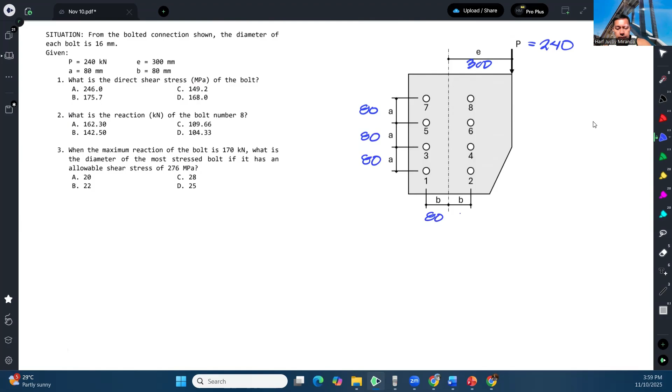Okay, so first question: what is the direct shear stress of the bolt?

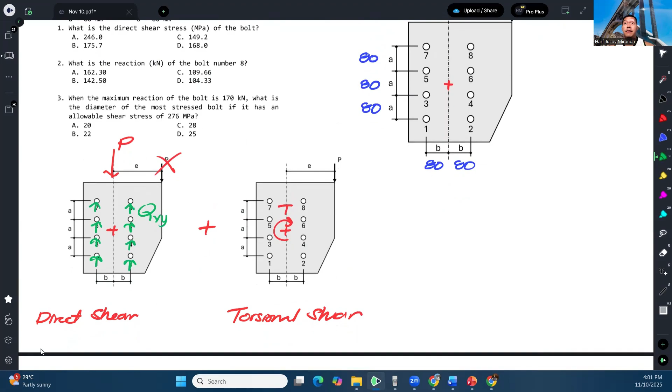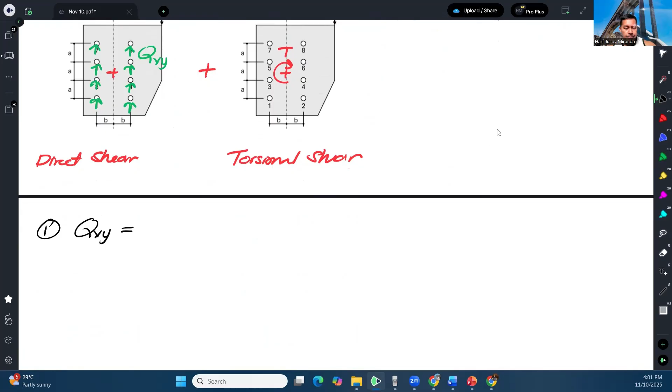Okay, so for number one, we have QVY equal to P divided by the number of bolts. So in this case, we have 240 kilonewtons divided by 8. So that's gonna give us 30 kilonewtons.

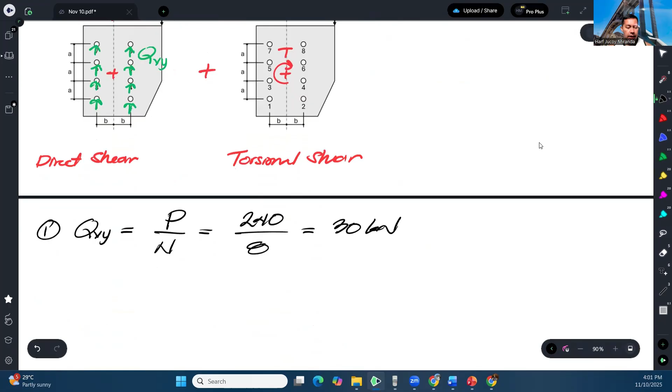Since stress is what's being asked, and the diameter of the bolt is 16, we will have shear stress due to direct shear as QVY divided by the area of the bolt. That is 30 kilonewtons divided by pi over 4 times 16 squared.

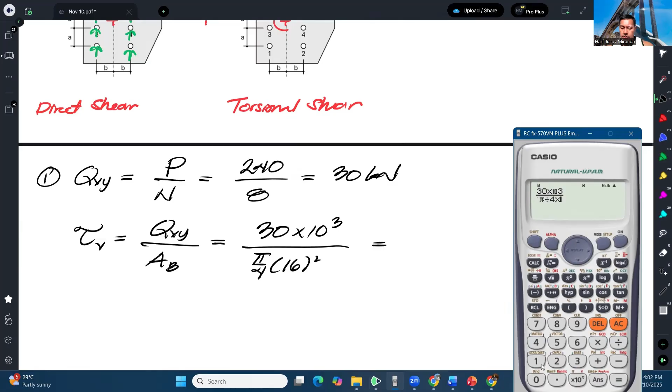So that's gonna give us... okay, so 149.21 megapascals.

Okay, that's for number one.

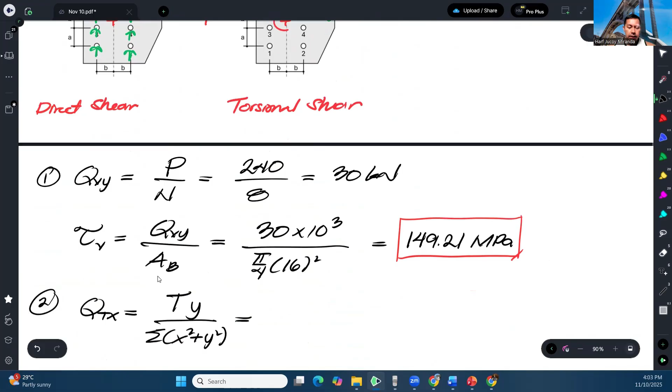So in this case, our T is 240 kilonewtons times E, which is 300, so our answer is in Newton-millimeter. So we have 240,000 times 300 - that is our T.

And then the Y of bolt number 8 is this, from here to here. That's his Y, which is 80 plus half of 80, so that is 120.

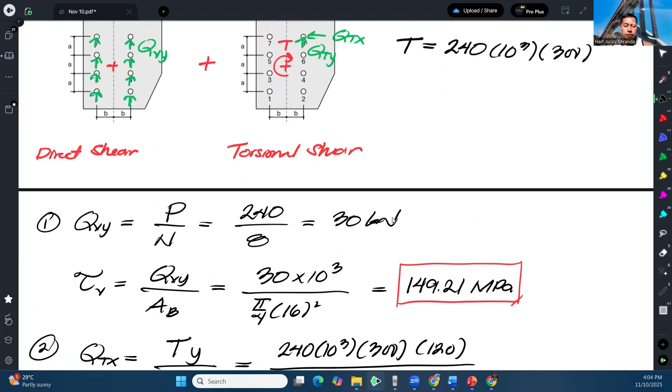Over summation of x squared. So for x, we have 80 as x for bolts 7, 5, 3, and 1. Then the x of bolts 2, 4, 6, 8 is also 80. So 80 squared, times 8 of them, plus y squared. The y of bolt number 7 and bolt number 8, 1 and 2, are all the same at 120. So four of them at 120.

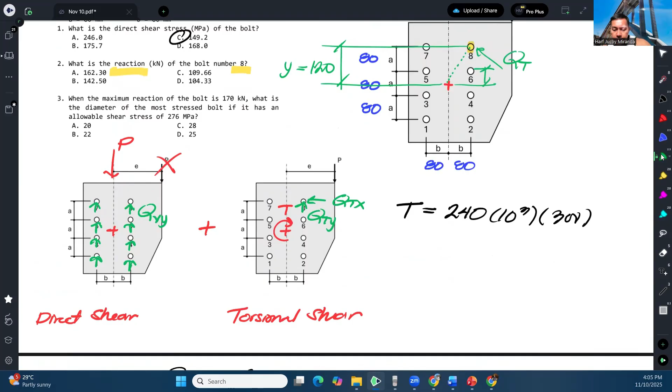Tapos yung bolts 5, 6, 4 at saka 3, ang magiging y nila ay ito lang. Ano yan? That is half lang ng 80, so that's 40. So 40, apat na 40 squared. Okay, and that will give us our x component of the torsional reaction.

So we have 240,000 times 300 times 120 over, lagay ko to sa A, Pascal. We have 8 na 80 squared. We have apat na 120 squared. We have apat na 40 squared. So that's gonna give us 75,000 Newton.

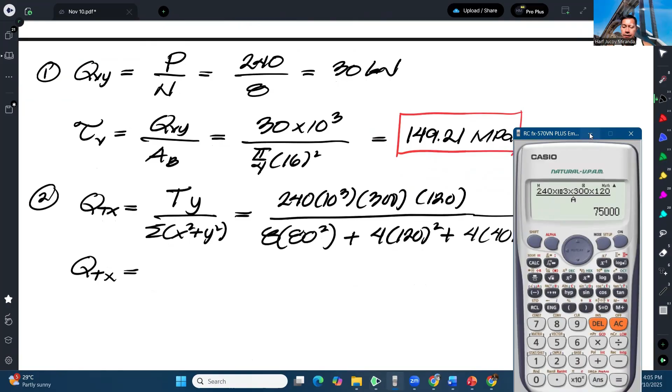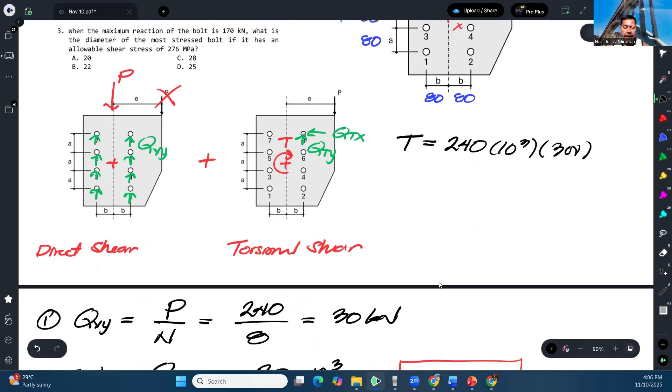Okay? For QTY, that is Tx over summation of x squared plus y squared. So once again, 240,000 times 300, yan yung T natin. Ang x naman natin for both 8 is simply itong 80, no? Ito. 'Di ba? Ito yung x, ito yung y, 'di ba? So 80 over the same j.

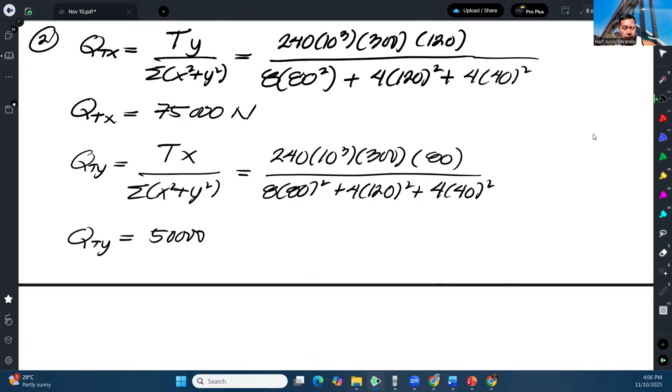So papalitan ko lang 'to ng 80. Okay, and that gives us 50,000 newtons. Okay? So therefore, our reaction for bolt number 8,

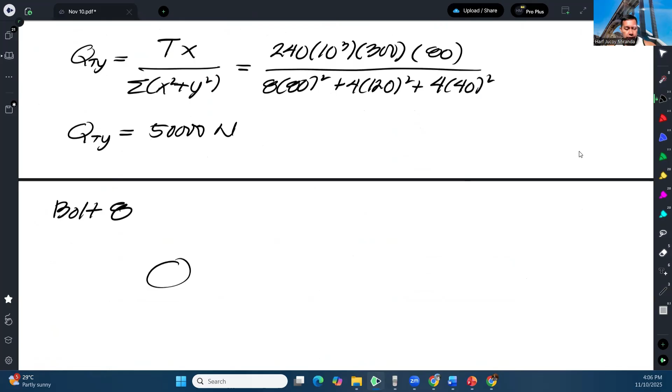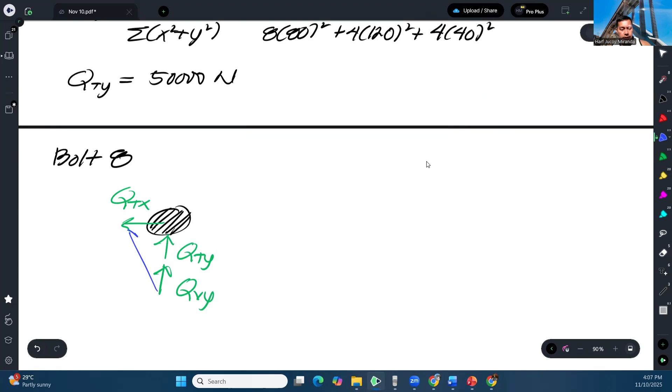Ito yung bolt 8 natin. So meron siyang vertical component ng torsional reaction, tapos meron siyang vertical component ng direct shear, and then meron siyang horizontal component ng torsional shear. So ito yung magiging resultant. Reaction sa bolt 8. Okay?

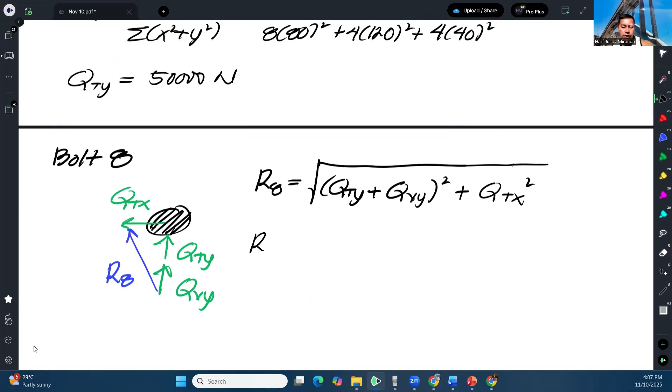So therefore, the reaction at bolt 8 is the square root of QTY plus QVY, so magko-combine, squared plus QTX squared. Ayan. Okay, so diretsyon ko na. So we have square root of QTY, 50,000 plus yung QVY, 30 kilonewtons, so 30,000 squared plus 75,000 squared.

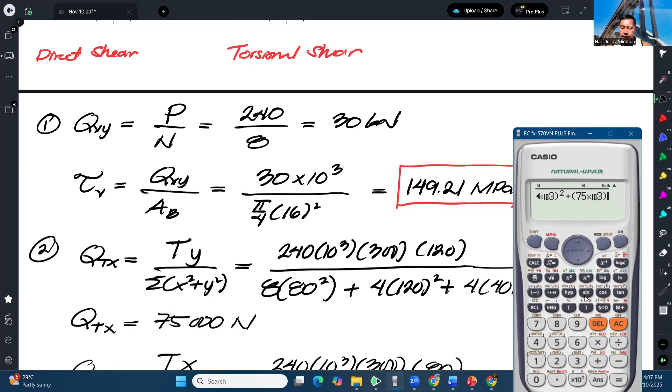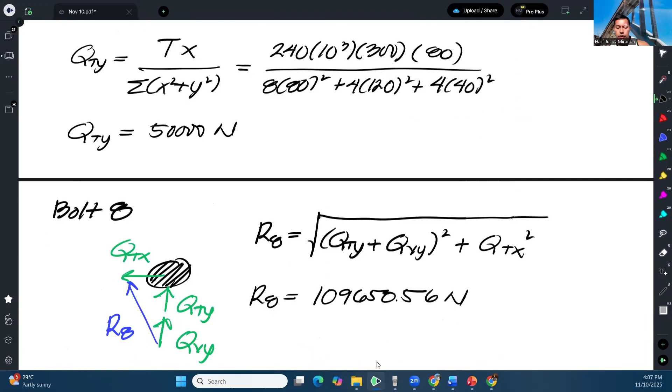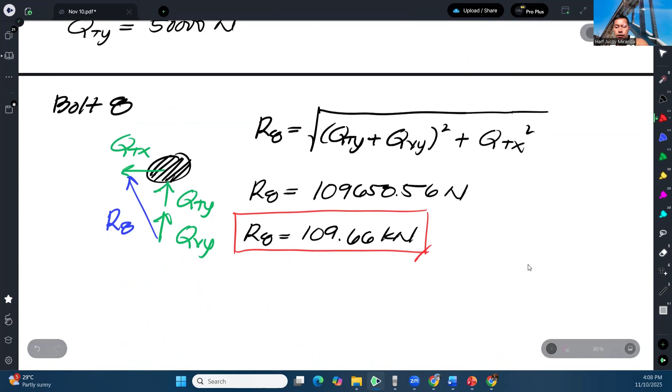And that's gonna give us 109,650.56 Newton. Okay, or in kilonewton, that is 109.66 kilonewtons. So that is the reaction for bolt number 8. So our answer for number 2 would be letter C.

Lastly, when the maximum reaction of the bolt is 170 kilonewton, what is the diameter of the most stressed bolt if it has an allowable shear stress of 276 megapascal? So for number 3, wala na siyang kinalaman dito sa ano natin, or wala nang silbi itong diagram na to dahil binanggit niya na kaagad na ito yung allowable stress.

Tapos yung reaction daw dun sa bolt na most critical, 170. Kumbaga, binigay na sa atin. Ang kumbaga, pinapa-design na lang ito number 3, ano yung required na diameter. So, bali, direktang ganito na lang yung number 3. Kumbaga, meron ka ng reaction na 170 kilonewton, tapos meron ka ng allowable shear stress na 276 megapascal.

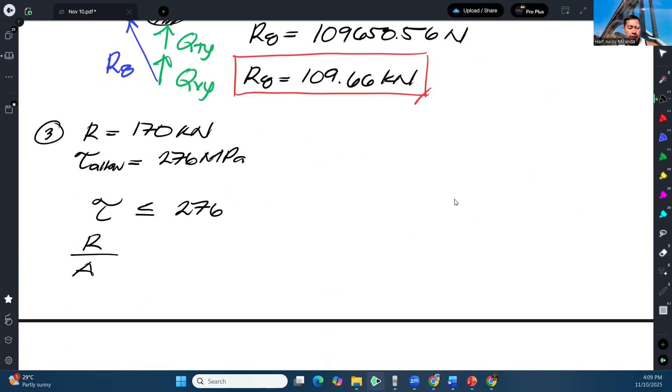So, bali, ang mangyayari lang, yung actual shear stress ay dapat hindi mag-exceed sa allowable. Tapos ang actual shear stress is yung reaction divided by area ng bolt. Di ba? So ano ba yung reaction? So that is 170. Gagawin lang natin itong Newton para maging same dun sa megapascal na units. Tapos yung area ng bolt, pi over 4 times diameter ng bolt squared should not exceed 276. And from here, you can solve for the required diameter of the bolt.

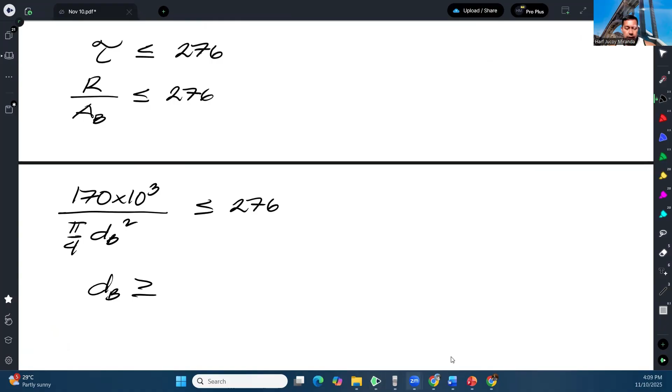And that's gonna give us 170,000 over pi over 4. Tapos divide 276, di ba? Tapos, kumbaga nangyari kasi ito, di-divide mo doon. Tapos ito, cross-multiply mo sa kabila. Tapos itong squared, para matanggal, mag-i-square root mo ngayon yan. So ito na yon tapos square root. So 28.004

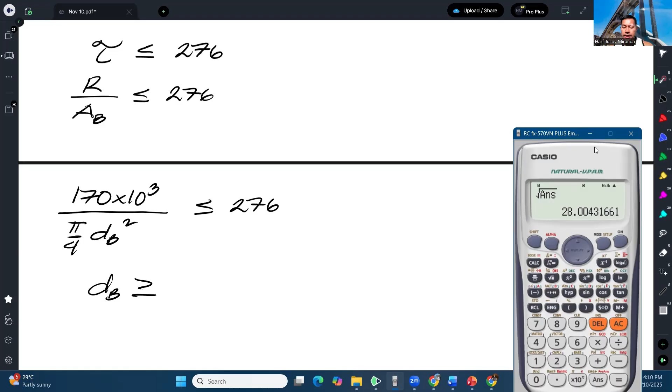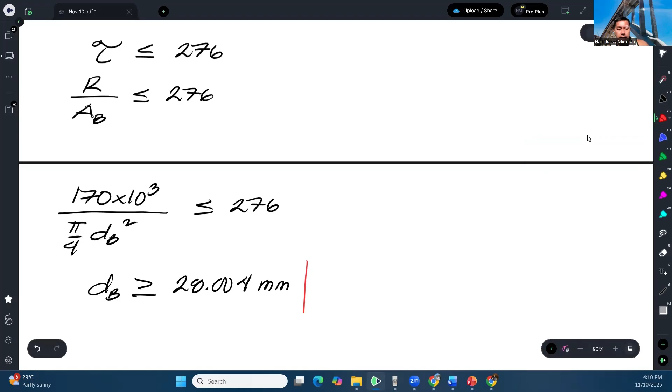Millimeters. So technically speaking guys, ang kailangan natin, mas malaki sa 28. Technically speaking, kasi meron siyang konting butal eh. Pero I think it's safe to assume that from the choices kasi wala namang iba na mas malaki, kundi letters sila. Kaya we will just choose the nearest from the choices. Pero technically speaking, dapat above 28 yung kailangan natin na bolt diameter to ensure na hindi lumagpas yung stress dun sa most critical bolt ng 276 megapascals.

Okay? But anyway, that's our answer and that's how we solve this problem.